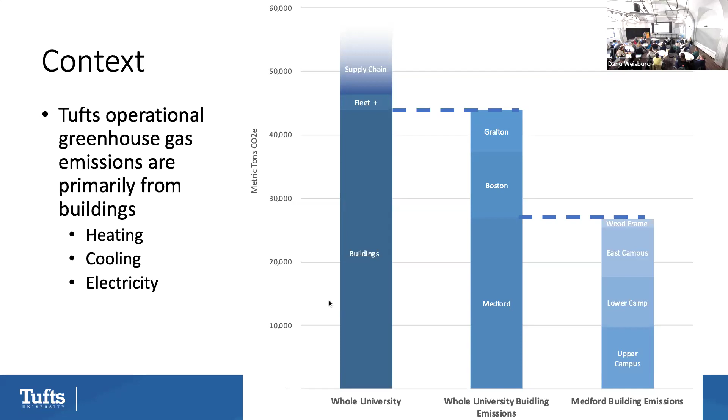So as an institution, we need to solve essentially a buildings problem. Let's talk a little bit about where that carbon is coming from in a minute.

This is the transition we're talking about—the energy transition, away from combusting things and to using electricity. So we'll talk about that more. This is an awesome moment, a career moment, when something like that happens.

The how you get to that is really complicated. When we think about the people and the money and the technology, in some ways the technology is the easy part. So we'll talk about that, but I just want to focus on the fact that the people are the hard part. Tina mentioned to me the other day that the first Hoku lecture of this semester was focused on storytelling.

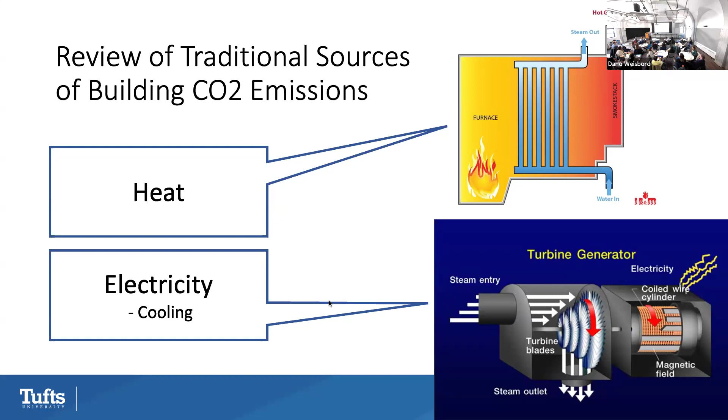On the electrical side, where's the carbon in this system? Well, to make electricity, I've got to make things go round and round. Generally, to do that, I'm burning something, turning water into steam. That steam's pushing on a turbine, going around and around, and I'm making electricity. Electricity is awesome, right? I spin a copper coil against a magnet, and I get an electrical current. You don't need to know any more than that unless you're actually an engineering major. I am not an engineer, and I've made a whole career in energy, and that's all you need to know.

I can get electricity from other sources. I know how to do that without carbon. I know how to do that now without coal. I know how to do that without oil or gas. I can do that with wind. I can do that with solar. These are our dominant modes. So if I can imagine a system where my electricity is carbon-free and all I'm using is electricity, and I stop lighting things on fire, I've kind of largely decarbonized my system. Airplanes are going to be a problem, just saying.

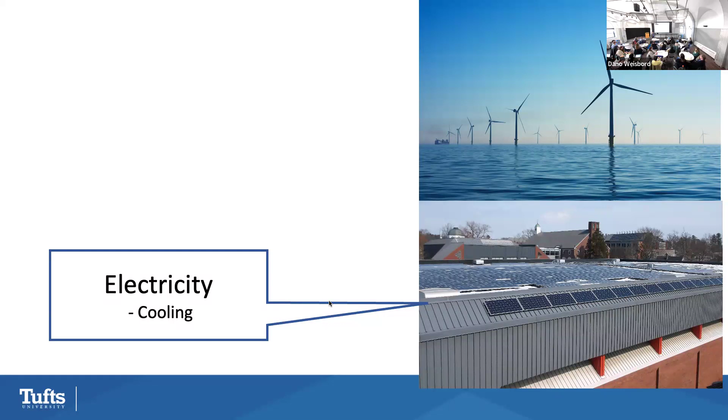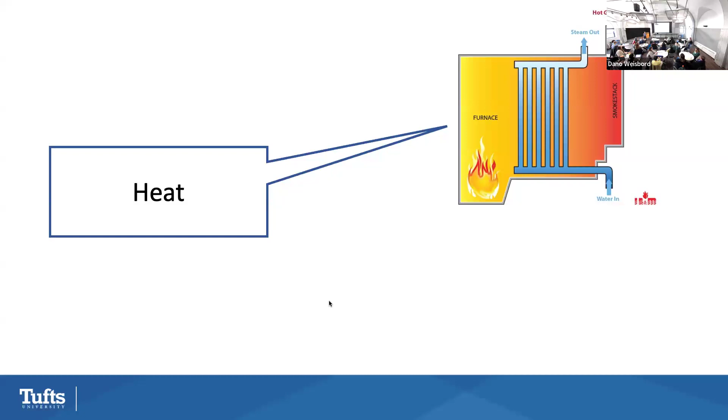So there's the heat side. The heat side now remains a problem because I've got fire in a box. So how do I make heat? How do I make things warm efficiently with electricity? And that's really the problem that we have.

So let me just talk a little bit about how we heat campus today. And then we'll talk about how do we do that in the future and how do we take that heat source and electrify it. That's our energy transition. So here's today at Tufts and at a lot of other colleges and universities.

We are providing all these services, heating, cooling, electricity, in a district system, which means my fire in a box is in the central energy plant, and then I'm conveying that heat out to buildings using something else. In our case, we use steam sometimes.

The steam runs through a pipe, or we're using hot water, runs through a pipe from the central plant out to the building. It's not that different than what happens in an individual building where there's a furnace in the basement and the heat comes up through water in a pipe or in a radiator.

Similar, but I've got a plant and I've got fossil fuel boilers today. So that's how I make stuff hot. I've got distribution, distributing with steam or hot water, and then in the buildings I have things like radiators or air handlers, or see these things down here at the bottom? This is perimeter heat. There's probably a hot water pipe running through that unit, and the air flows over it and makes the room warm. It's doing pretty well today. So that's kind of how we do things today.

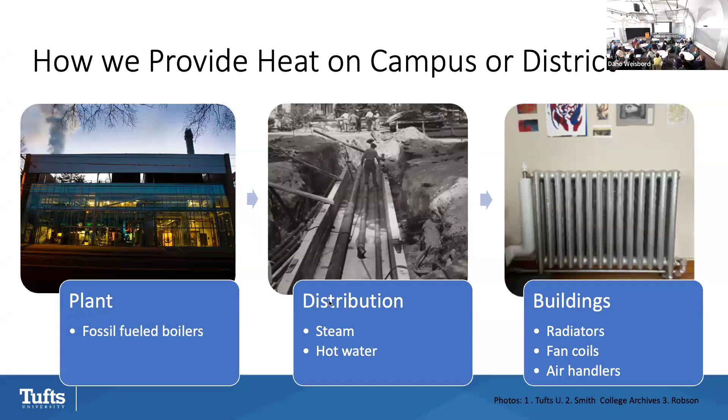This is literally choo-choo train technology. Imagine a steam locomotive, I've got a big fire and I'm shoveling coal in there and there's steam and smoke going everywhere. And all of that is actually representing waste. The heat coming off a steam locomotive, we have the same problem in our district system. We estimate we're losing about 20% of the energy just in distribution. So I've got fire in a box at the CEP, and that's 80% efficient, and then only 80% of that is getting into this building. That's not an awesome system. That was a great system when coal or oil was really cheap and we didn't care about burning it.

So we have some options for decarbonizing a campus. Some people talk about offsets, and we could offset all of those carbon emissions, which basically means we could pay somebody else to reduce their carbon so we don't have to. That is not a winning strategy from a global perspective, because we can't all pay somebody else to reduce their emissions.

Option 2 is we could use biofuels. A lot of college campuses have used biofuels, I won't name them, because I think this is something that sort of has come and gone as an idea. Maybe we could burn things that were in the biogenic cycle and maybe there was less carbon emissions. If we burned wood, maybe that was less bad, because the carbon in that wood was sequestered maybe 50 years ago, whereas the coal's carbon was sequestered millions of years ago. So maybe it was better to do something in that biogenic cycle rather than extracting it from underground.

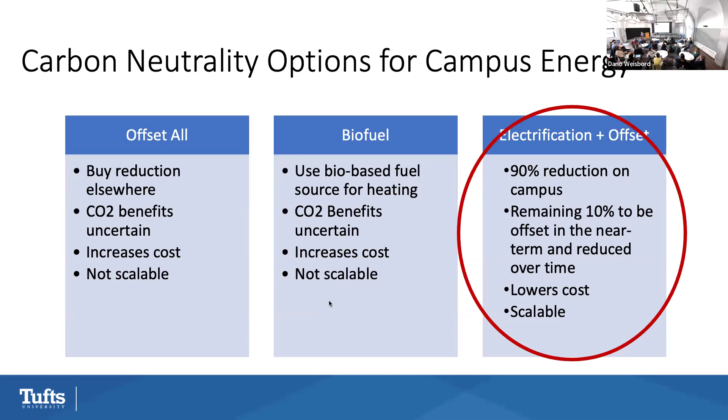So a refrigerator is an electric device that moves heat around. It moves, let's call it thermal energy. I can move the warm thermal energy inside of the refrigerator, I can move it outside the refrigerator. That's pretty cool. Anybody else, what's another everyday object that does this thing? Air conditioner, who said that? Right there, okay, window air conditioner. It's moving the heat inside the room and pushing it out, or taking the cold air out and putting it in. Either way, it's actually doing both at the same time. You could heat your room by turning that window air conditioner around in the window. It's not super efficient, so I don't recommend it, but it is theoretically possible.

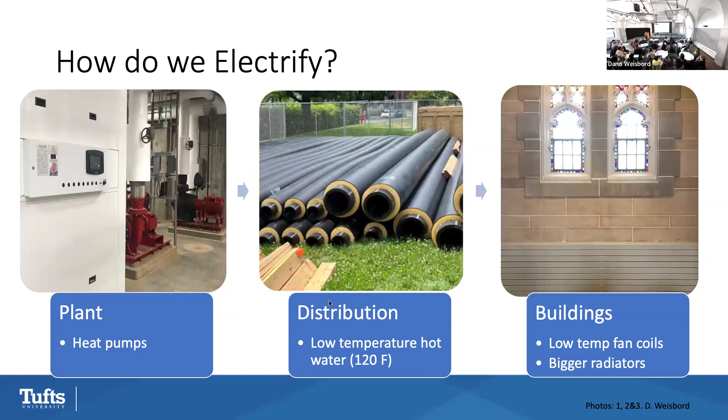What are you talking about, Dano? Okay, let me go back. Imagine it's a really hot day and you're sitting in this room and it's hot. What's happening? What's the temperature under the ground in the middle of the summer here in Medford? Anybody know? We have geoscientists. 55, thank you. We do have a geoscientist. Right, awesome, 55 degrees. We go down 1,000 feet, it maybe creeps up a couple of degrees. But essentially, we have a constant temperature year round.

So imagine I push some water down into the ground and my water cools off to 55, and then I bring it up. And imagine that water comes along in a pipe, I bring it into this room, and I blow a fan across it. I'm cooling this room, and I'm doing that for the price of pumping the water and the energy going into the fan.

That's actually a pretty efficient system, right? So on the cooling side, geothermal heat pump is really kind of an awesome thing. On the heating side, it does something similar.

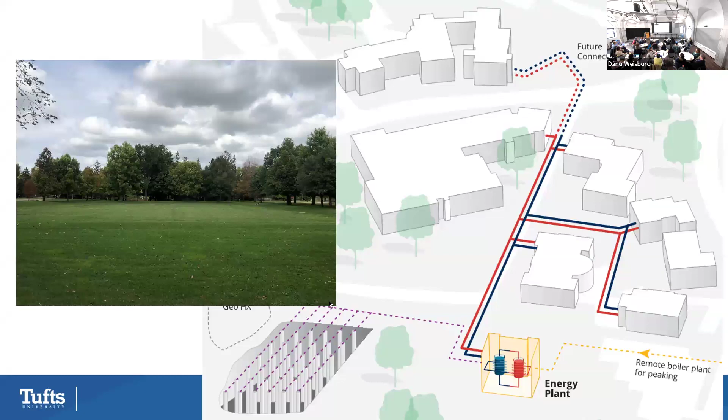All right, so let's look a little more in depth at where we're sitting now. Here's our Tufts Medford Somerville campus. And I made it sound simple, like there's one central energy plant and we distribute heat out to all the buildings. Actually it's more complicated than that.

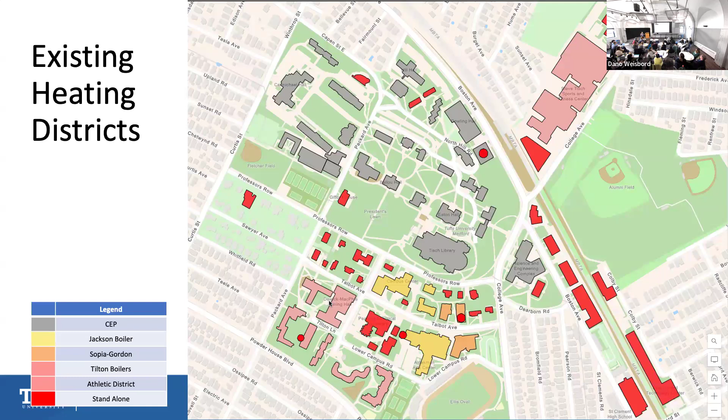So we're in a planning process that says let's take a look at all of these pieces and think about, that's a lot of energy. What's the planning process look like? Step 1 is to say, well, how much energy is that? How much heating energy, how much cooling energy?

I kind of know how much thermal energy, how much heating or cooling I can get out of a geothermal well, but do I have enough space even to be thinking of this as an option? I might not. For example, if you said, hey Dano, can we just put solar panels everywhere to provide all the electricity to campus? I'd say not on our campus, because this doesn't match up from a scale standpoint. You need much more space to make enough electricity for Tufts' electrical demand if you're getting it just from solar.

Right, we just sort of said, well, what's the total thermal demand? And just conceptually, do we have enough space to drill enough holes to meet that demand? So the very first planning question was, how much energy? The second planning question was, could I look at geothermal? Is that a sensible solution for our campus? And that second answer is yes.

Okay, tick, tick. Now I'm on my way towards electrification.

All of the things that I've been talking about, right? I sort of mentioned them earlier. This costs money.

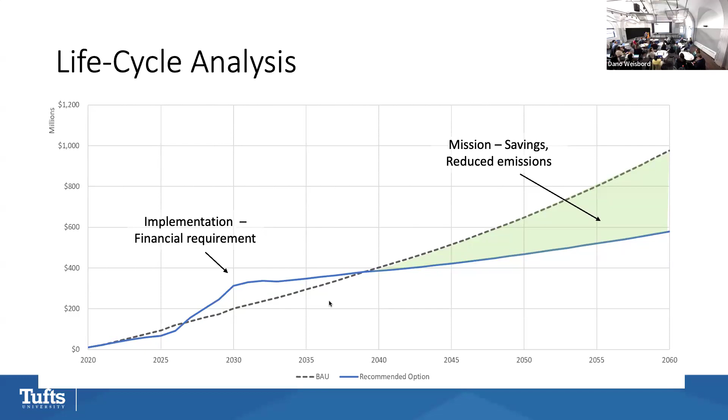And so when we do our planning well, we end up with something like this. That's kind of our goal, is to end up with a chart that looks something like this. And there's a lot of things that make it more expensive or make it cheaper. So as engineers say, it's a real optimization problem, and it's iterative. We keep trying different ideas over and over and over, but then we test them by looking at them through a financial lens.

So this is sort of my big point, right? There are certain things that we might do that increase the initial cost, but there's other things that we might do that decrease the operating cost. So the best example of this is if we could circulate water around the campus at 170 degrees, we wouldn't have to spend as much money to convert buildings to be compatible with that system.

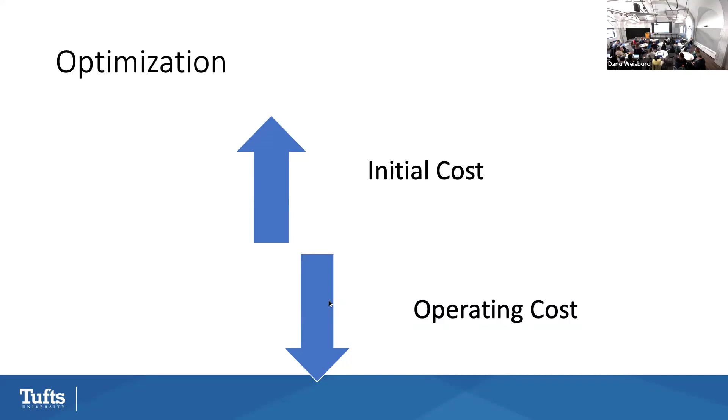But it's a more expensive system to operate. If I could operate the system at 120 degrees, it's going to cost a lot of money to convert all the buildings, but it'll be really cheap to operate. So how do we make those decisions? That's where the life cycle cost model comes into play, because maybe it's not 170 or 120, maybe it's 150, maybe it's something in between. We have to test those ideas, and that's a lot of the planning work.

Okay, let's go back to the people just for a second. We are working right now with an engineering firm called Salas O'Brien. Josh, sitting there on the side, is one of our engineers. You should definitely talk to him afterwards.

So we had these engineering students look at this as a potential project. We did that for a lot of reasons. One was that we actually wanted the answer to that question: was this a viable thing to do? The second was that it's really important for us to make sure students are engaged in the problem solving, because when we go to tell our story to the board of directors and say we want to spend $210 million, the first question they ask is, shouldn't we be doing something that's more on mission?